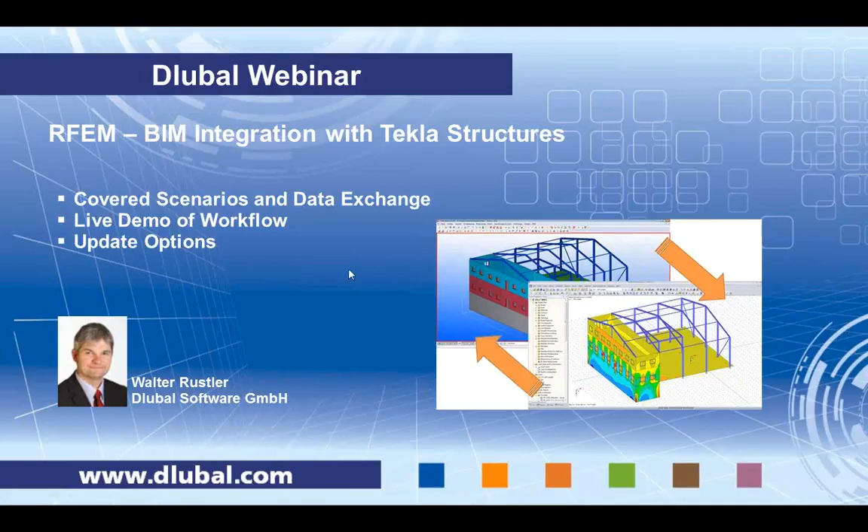So in a sense, it gives us more specific options to import and export data and to directly connect the objects in both applications. It is a bidirectional interface with update options, and it works in a 32-bit and a 64-bit environment.

We can distinguish between a physical model and an analytical model, and it is important to know the difference. In general, when you work in an architectural program or a CAD application, you basically model the structure as you would build it later. When you do an analysis, you make a more simplified model that doesn't include all objects, like, for example, door frames, window frames, and other non-load carrying parts in that model. Therefore, we have to make a difference between the physical and the analytical model.

And in general, there are some problems when you work with a physical model in a structural analysis program, because, for example, a beam might be cut off at the edge of a column, and therefore there is a gap between the center line of the column and the end of the beam. So in the analytical model, we have to overcome this gap and provide a connection, basically bring together all load-carrying parts in one structural wireframe model. And it's a mechanically correct model that includes also maybe 1D members like columns, beams, or bracings. It may include walls, slabs, or other surfaces.

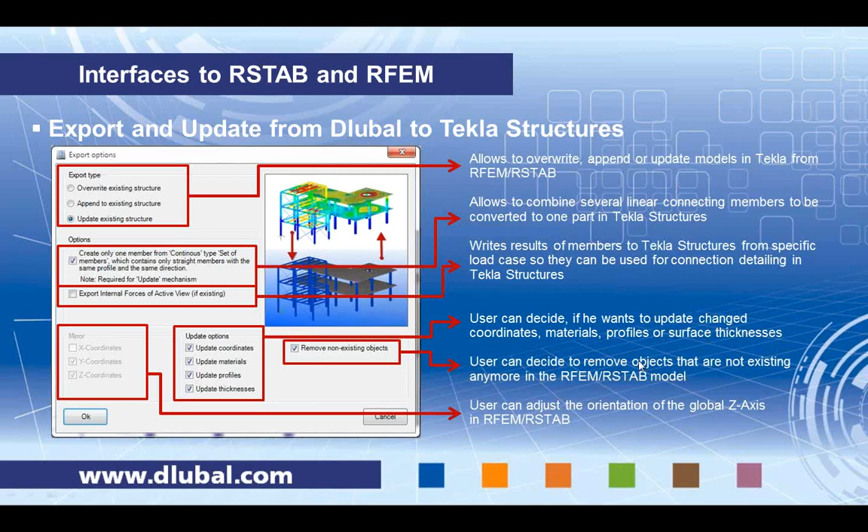Additionally, we transfer information like the node numbering of the Dlubal analytical nodes, or the material, or set of member numbering, so you can find the parts that you see in RFEM also in Tekla Structures. By inquiring the objects, you will find there, okay, member number 235 in Dlubal. This is what I have here now.

And I can go to the Dlubal model and see, okay, where is member number 235? All those user attributes can also be displayed on a drawing, for example. So it would be a good way to use it for an overview plan that displays the numbering of the structural objects, maybe, or whatever you need it for.

Anyway, we can update the Tekla model with grid lines, with information about the used materials, and also the node numbering, and additionally comments. That means I can write there, for example, this is a new beam, and then this comment will be also there as a user-defined attribute, which you can use then for filtering inside Tekla and so on.

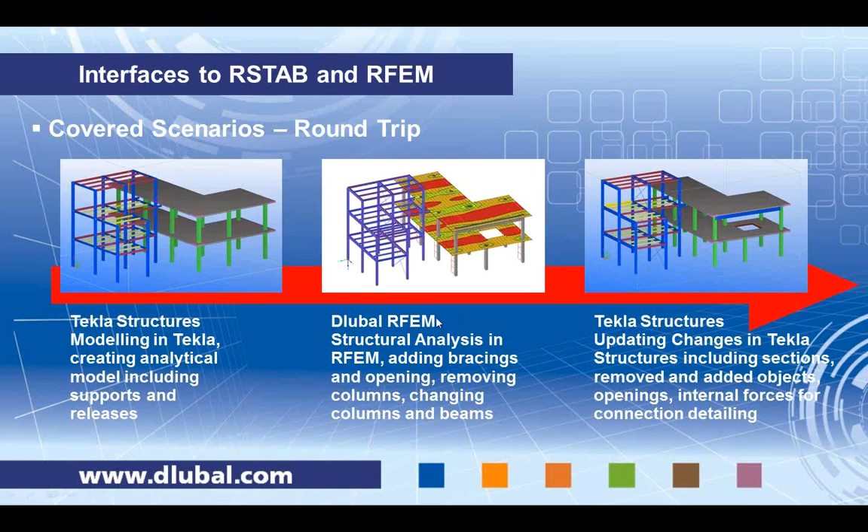Another option would be, and we will see this live in a few seconds. Another option is to start modeling inside RFEM. RFEM has great modeling capabilities as well, or you can retrieve a model from somewhere else, from other applications, and we do the structural analysis, but there is no Tekla model.

But somebody would like to have a Tekla model from what he has created inside RFEM. So we can just export it and create also a Tekla Structures model from scratch.

The advantage of this is, for example, you are a draftsman or a detailer, and you need to know which cross-section is used for which column, for which beam. Maybe if there's a simple model you understand and you can read it, but imagine there are 1,000 members and 500 different cross-sections, then it's not so easy to even know which cross-section is where.

And if I have a Tekla model and I'm a Tekla detailer, I might want to work inside Tekla, not so much inside the RFEM viewer. So I can use my environment, my well-known tool, to get this information and to communicate it with somebody else, or to use it for even detailing and modeling.

All in all, it is all about saving time, increasing quality and productivity, and this at the same time means also avoiding errors. I think you have very well matching tools here with RFEM and Tekla Structures.

The next will be the live demonstration. We will do this 3D building here and import it from Tekla Structures. But before we do this major structure, I'd like to explain a little bit the options you have inside Tekla. I would like to point out that I'm not a Tekla expert, but I can show it a little bit.

And if you have questions about Tekla, please also contact your Tekla vendor or your Tekla company. You can find them at tekla.com. I'm sure they can help you out in more detail.

I have Tekla open in the background, and I'm now inside Tekla Structures. Here I have a simple model which is not very spectacular, but it includes a few things I think that are important to explain the use of this interface.

So here you see the physical representation of this model, and you see there are certain beams and columns. We have the situation that some beams are top of steel, some are maybe connected center line, above, whatever. We also have here a column that is a typical situation where there's a wide column and a narrow column.

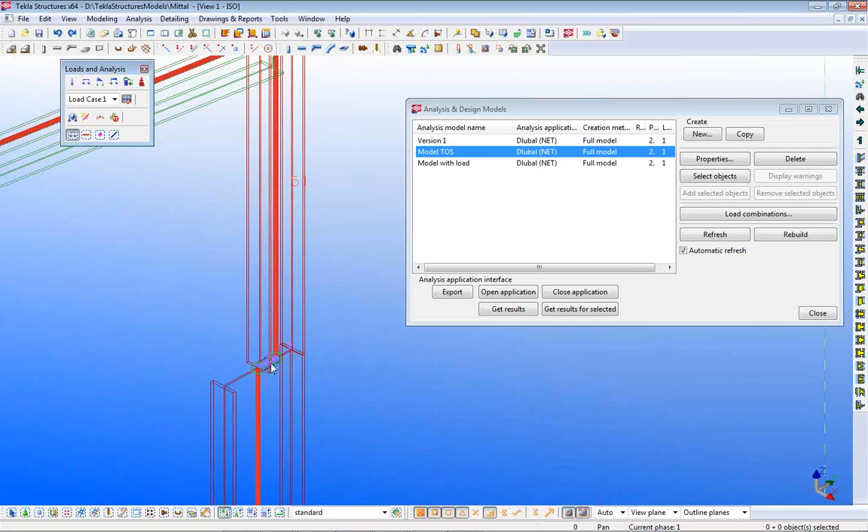We see here, for example, now everything is modeled by the center lines of the columns. So the statical model is in the center line of the physical model, and because of this we have here an offset, and this offset is closed by a rigid link, which is shown there in blue. This is done automatically by Tekla, more or less.

Then we have here the beam on top of the frame, and here the analytical line is in the center line of the top flange. So it is important because you might want to have the correct column length or the maximum column length, and if I analyze it in the center of the beam here, then I would lose maybe half of the depth of the beam and so on.

And maybe if I have a wind load there, the wind load is not big enough. So how can I do this?

I create something like this new, and I say here create new model. I can have several models inside Tekla, inside one Tekla model, and I can say this is my model new 2 maybe, and here I can select whether I want to use the full model or only selected parts or different settings. I can apply filter if I want to.

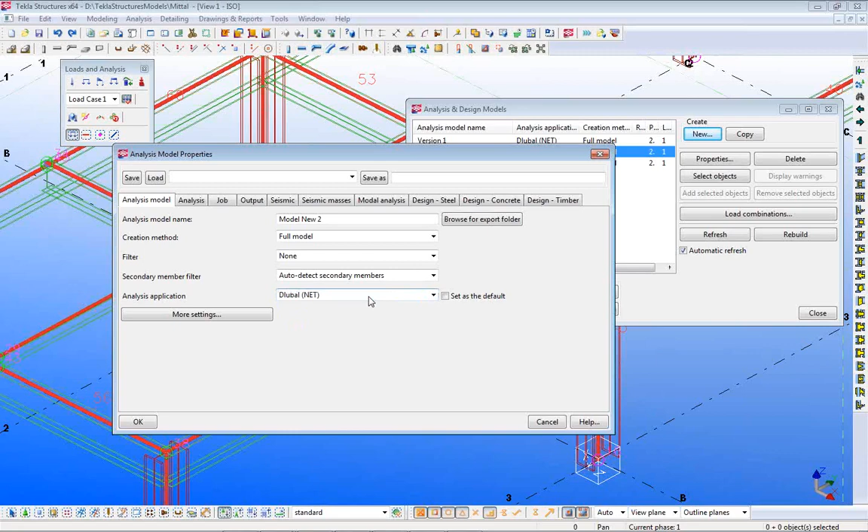There might be other interfaces here listed in Tekla to use. And then we have here more settings, and in those settings we can set up the reference axis, member axis location, and this is an important thing. Now it's set up reference axis eccentricity by neutral axis. I can also use, for example, the neutral axis.

If I do this and click OK, you see what happens. All the analytical members are moved to the center of the physical member. Because we have here a different depth of the sections, we have the problem that the center lines do not meet in one point, and Tekla automatically creates so-called rigid links.

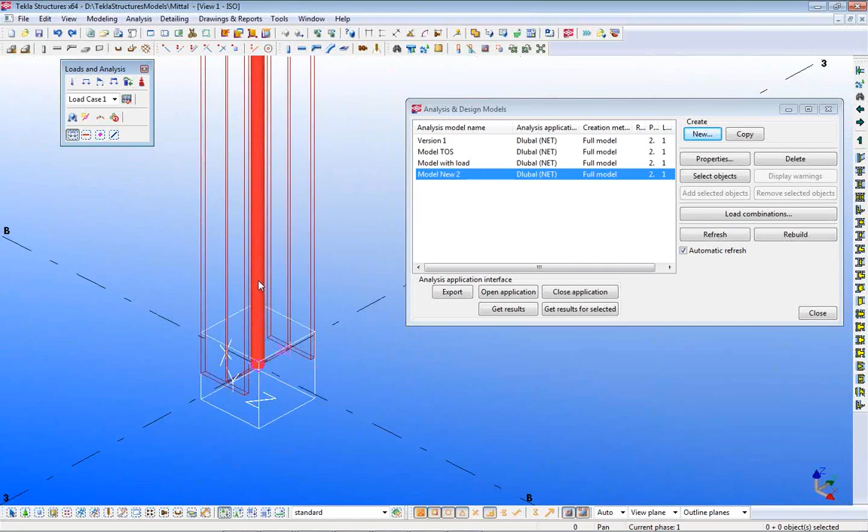Also inside Tekla we have here, for example, support conditions symbolized by a white block here. If I edit the member here, okay, let me see, to edit it, okay.

It's possible typically to, maybe I have a filter which is not - I'll show this later to you. We see here that there are numbers for beams and for nodes. We see here the supports, and we see here how the physical model changes.

If I change it again, for example, to not neutral axis, but reference axis - if I do this, it is rebuilt automatically, and you see here other placement of the center lines.

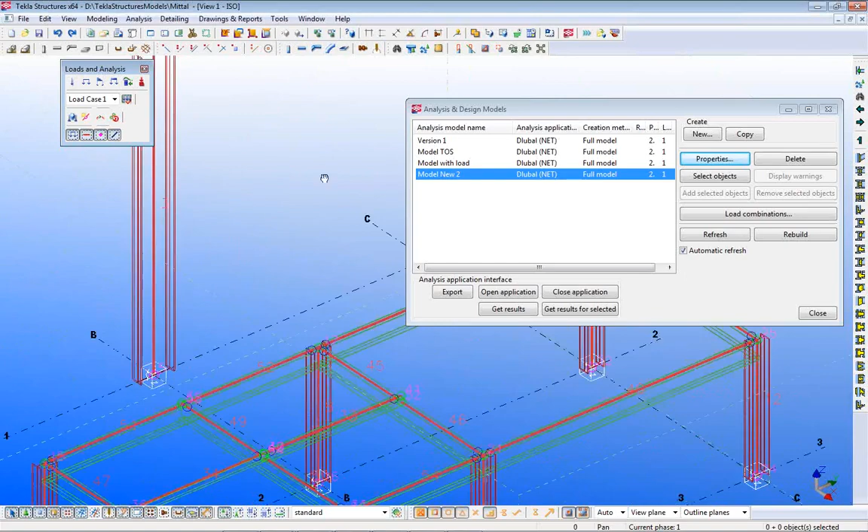Okay, I didn't activate my mouse arrow here. So let's say I want to change something here, not globally but locally. For example, here I would like to say this analytical object here should not be on the reference line.

I can change it, and I can say here, okay, position, not reference axis, but maybe neutral axis. And I modify it, and axis, reference axis, let's see what happens.

I had this problem also yesterday during a demo, and then it worked, but never mind. You can do it also individually - that means you can do it globally, so all the offsets are changed, or you can do it member by member.

Let's take a look at the support conditions. If I click on the column, for example, you see here start release is a support, or it can be a pinned support, or it can be only connected, or you can have also free definitions. Then you can enter some spring constants and so on. The end release is only connected, so on the top here we have no connections.

Or the same thing here for the beam. I click on it and say start release is connected. We see here with a release, and I see here a circle. If I do not want to have the release and say I want to have it fixed, I modify it, and then it's changed.

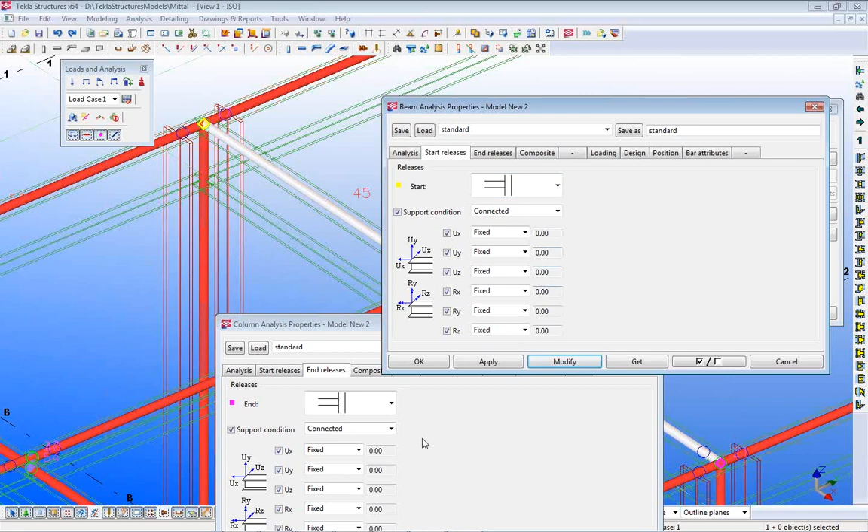So it is possible to individually adjust this analytical model. I open another model here. We see, for example, there are also loads. I can display the loads basically here. You see here there's a load inside Tekla Structures where we can apply the magnitude of the load, and this is also possible to implement inside Tekla.

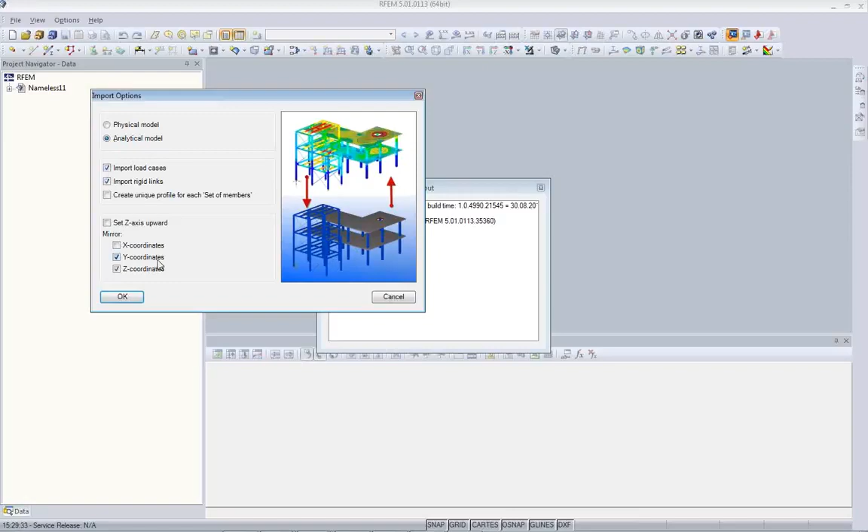Maybe I try to import this model quickly into RFEM. I open RFEM here. In RFEM, I open the direct import from Tekla Structures, and I get my import option that we just saw in the slide. I want to import the analytical model, import load cases, the rigid links we see, click on OK, and now I have a selection of the various analytical models I have inside Tekla Structures.

So the same models that I have here are given to me as a choice inside the interface. So now I use the model with the load, which I'm just displaying here. I click OK, and there is a little bit of a protocol that goes through, and then I have here my structure inside RFEM.

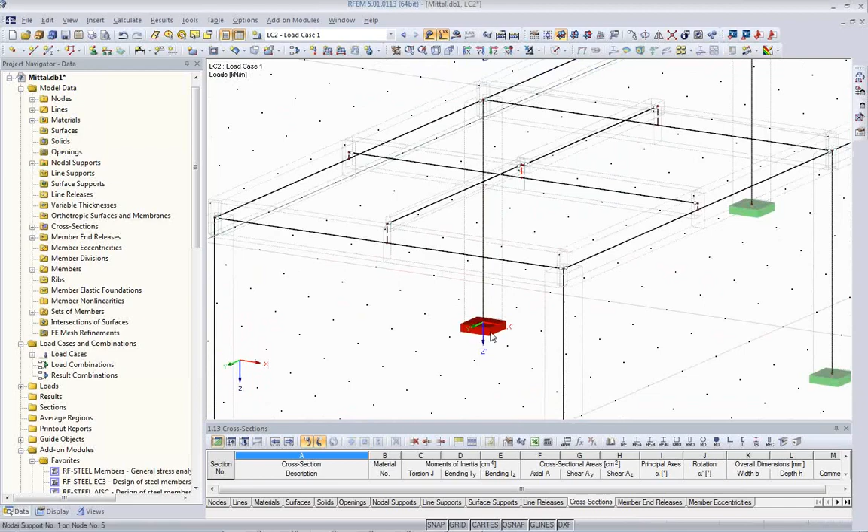We also see the load is here, and if I go to the wireframe display, we see also we have rigid links, we have the offsets that come from the Tekla structure model. We see the support conditions are here that we can use, and also the columns have this offset here. So this is how you can set up your model inside Tekla Structures and change it, and already prepare the structural model inside Tekla Structures.

Now I'll use the more complex model that I have prepared, and I open this inside Tekla Structures. This model includes not only beams but also slabs and walls, including openings, and I prepared several models inside already.

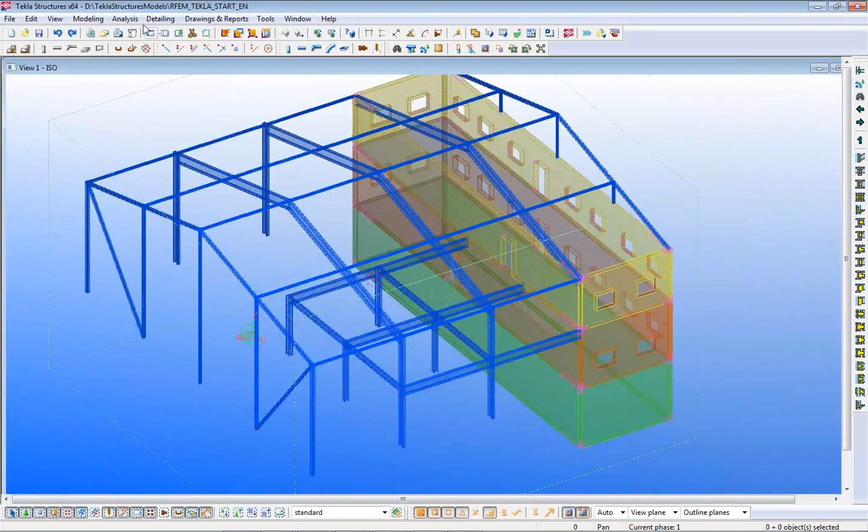You see here it's a hall including a second level, and there is a basement including some slabs here with openings, windows, and so on. Inside this model I have prepared already the analytical design model.

Actually I've prepared several models. I have prepared, for example, the concrete part, so I only get the concrete part here. For example, I can quickly import it here - concrete, and import here the analytical model. I don't want to load this time, and say here concrete part.

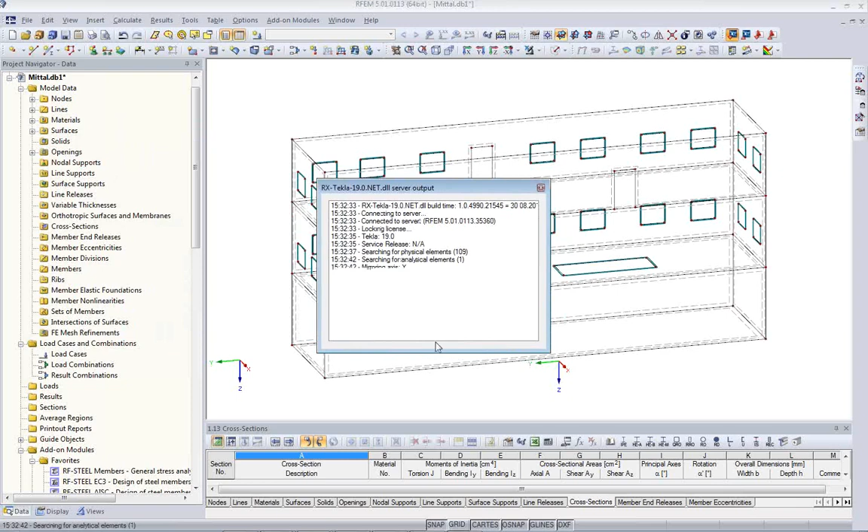So even though I have a 3D model in Tekla Structures, I can load only part of this model, and I can say, okay, now I don't want even the 3D concrete model. I want to have maybe only one floor or one slab in the first level. So I have just one slab here that I can work with, so I can do a simplified analysis.

And also the same way I can say I want to have only one end wall, and I do like a 2D analysis of this end wall here, for example. If you want to, you can import only one beam if you want to.

Please note, here's two analytical members. Inside Tekla we have one part. When I update it later, it will be staying one part inside Tekla. But actually I want to have the entire model.

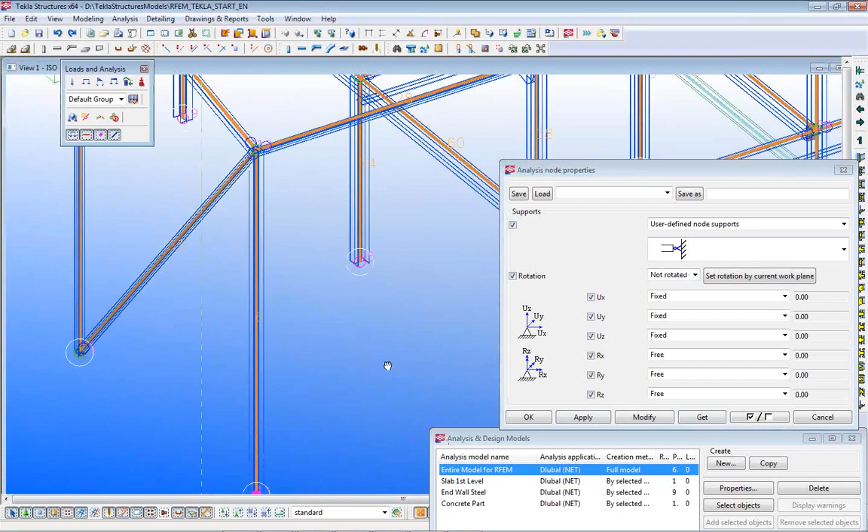Maybe I explain a little bit about the entire model that I have done in Tekla Structures. Here we have support conditions, which are pin support. We have set up releases already at the ending of some beams here.

We have openings. I've made the model in such a way, for example, that those beams here are modeled as top of steel, and this analytical model lies on top of the center of the top flange. So it's one level, and important is when we update the sections later, that those sections, even if they change in the section, they should stay top of steel.

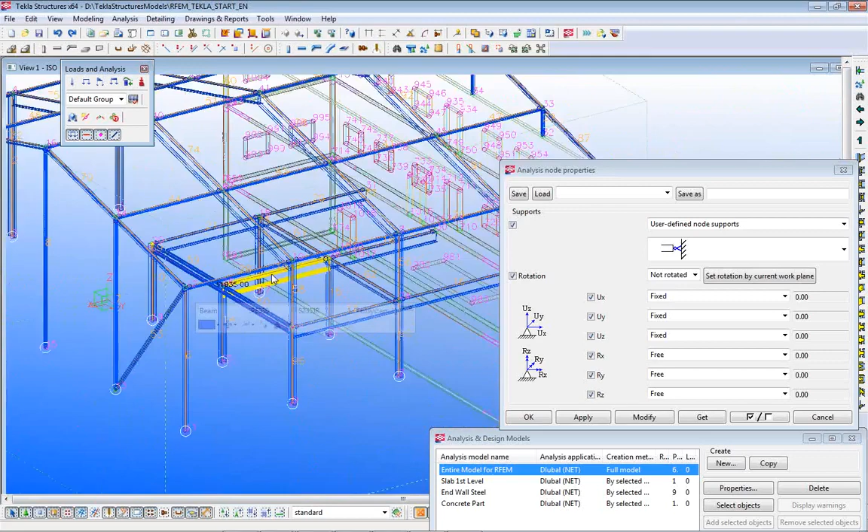Also here the walls are modeled as center lines, and the slabs as well. So I'm closing the model here and stay with the physical model view. I start inside RFEM and import the analytical model, including rigid links, which I don't have at the moment, and click OK. Now I choose the entire model, click OK, and we are importing the entire structure.

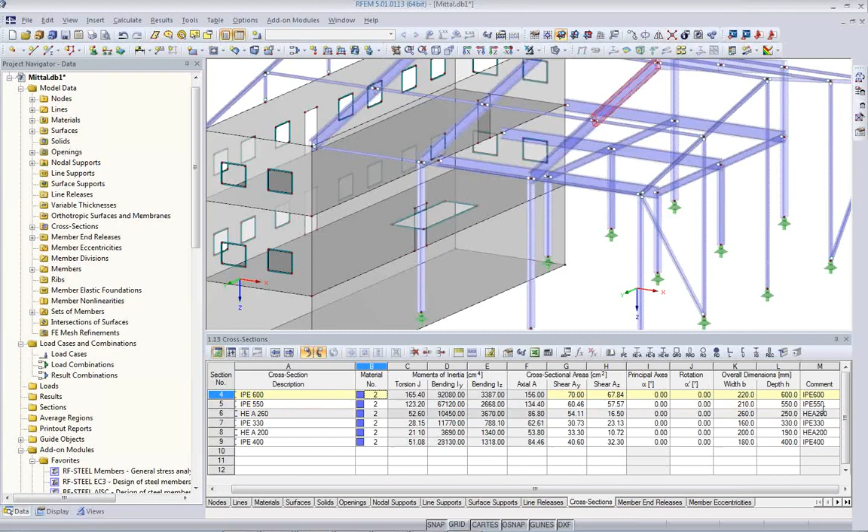We see here we have the supports, we have a variety of releases here. We have the openings, and we see on the display that we have already cross sections imported. When I look at the table of cross sections, I see they are all converted from the Tekla designation, which is missing the blank between IPE and 550, but Dlubal has a blank there. So we internally map all these cross sections.

Also, the materials are already set up according to Eurocode, and in Tekla the material name is much simpler. We include the code. How does this happen?

When we import, we have a variety of files, of course. We use direct import from Tekla Structures, and in the details settings I have the option to set up a conversion file, or I can edit this conversion file. Here I set up which name of the material or cross-section should be converted to which name inside Dlubal software. I have the option to import and export it from Excel, and set it up in my company as I like for my typical materials. Once I've adjusted it, it will be valid all the time.

The same applies for cross sections. You can use this very well if you have non-standard sections coming from different vendors. Everybody has his own designation, and it's basically impossible for us to know all the names existing in the world. So we match the Tekla name and the Dlubal name, and can now translate those cross sections automatically.

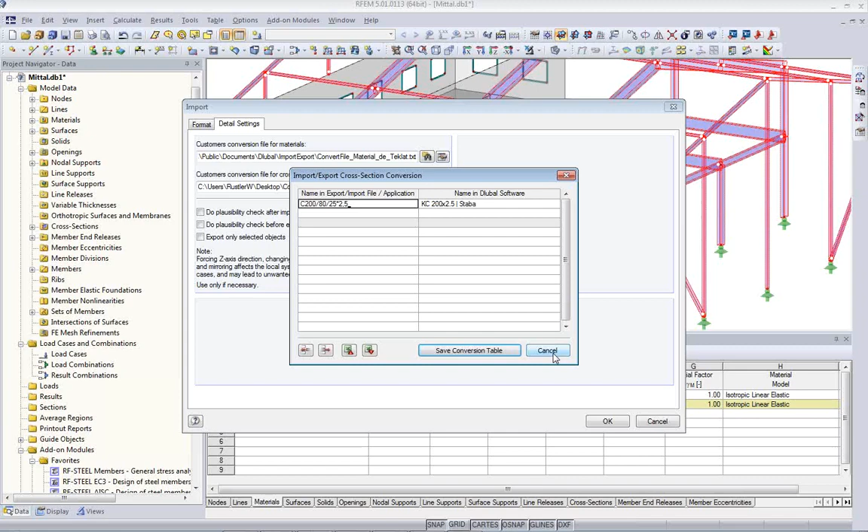Now we'll do a brief structural analysis with this model here, a 3D analysis. We'll change some cross sections, add some members, and do some concrete design. It's a totally, basically independent model from Tekla. I can do whatever I want with it. It's not some special model that only can be used in conjunction with Tekla.

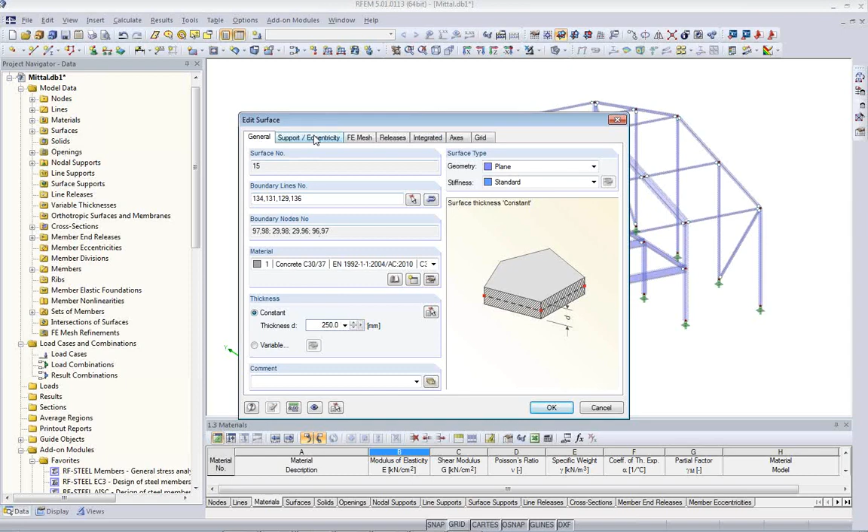So it's totally independent. First of all, I would like to know if it's really working, if it's really well connected and done correctly. So I do a first run and a brief analysis. First of all, I need a support on this foundation slab here, and I enter this support inside RFEM.

I select a non-movable support as a first idea of this support condition, and edit the surface and add it there automatically.

Next, I need a load case to see how the deformations are, or if it calculates and if some parts are loose. So I simply create a new load case, called maybe self-weight of the structure. It will be done according to first order with a default mesh of 50 centimeters for the slabs, and we'll do an analysis. And it seems to be working.

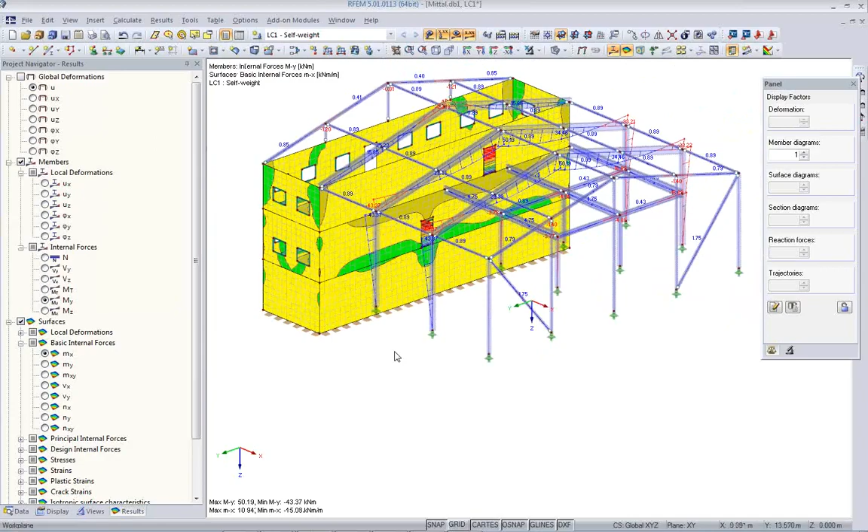I have here now a moment diagram which looks reasonable. I have maybe internal forces of the slabs which look pretty okay.

I can maybe show also the deflection, maybe not now for the concrete, which is rather massive and almost zero, but maybe I only show the steel parts—concrete surfaces by concrete, but members by material. So we can see here all the deformation lines of the members. I can animate them, and this way I can find if there are some loose parts usually, and it looks all good.

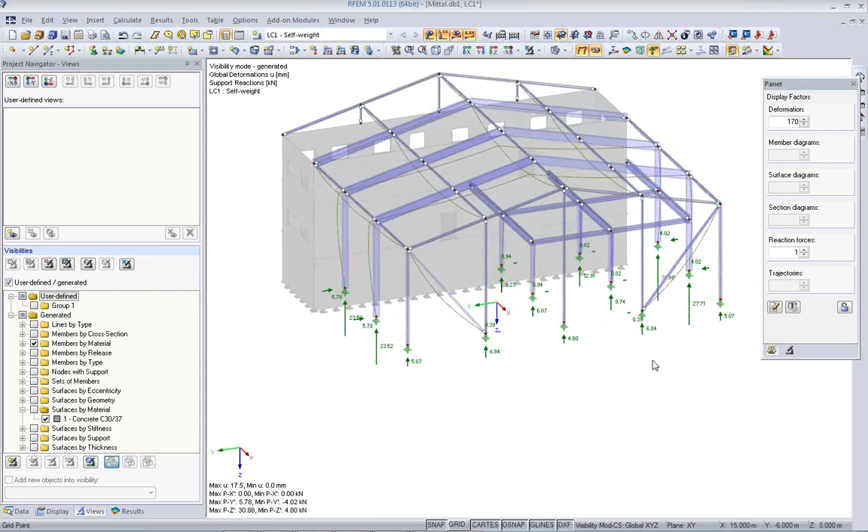Also, the support condition should be more or less symmetric, which is here at the columns, at the corner columns. There's a little bit of difference because here we have this floor structure in here, but it looks quite okay. So my model is of good quality, and I can continue doing the design process.

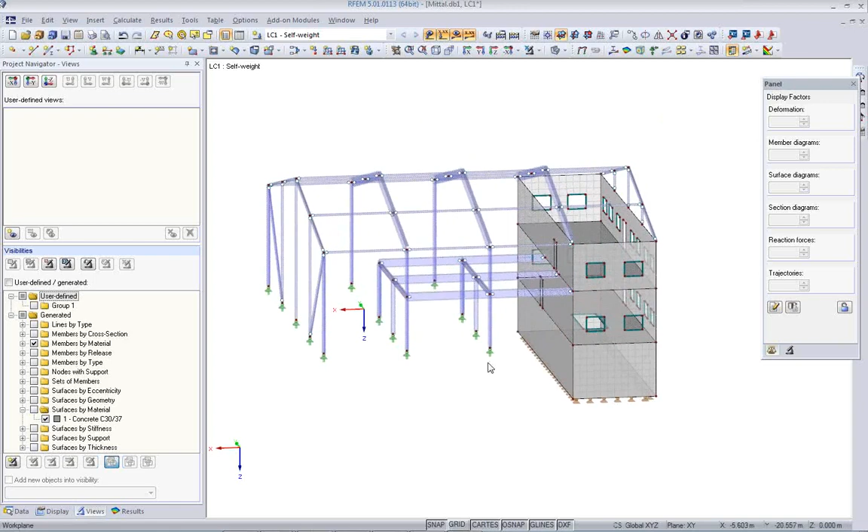First of all, I have to check another thing from the structural point of view. I need some bracings here in the roof—typically we have some bracings here. The first level here of the grid is supported horizontally by the concrete part here, but the roof structure maybe is a little bit unstable, and I would like to have a bracing here.

Before I do this, maybe I prepare some typical views of the structure. I select the roof and create a new visibility from this roof structure like this, and say, okay, this is what I like to save, and I create a new user-defined view. I call it roof.

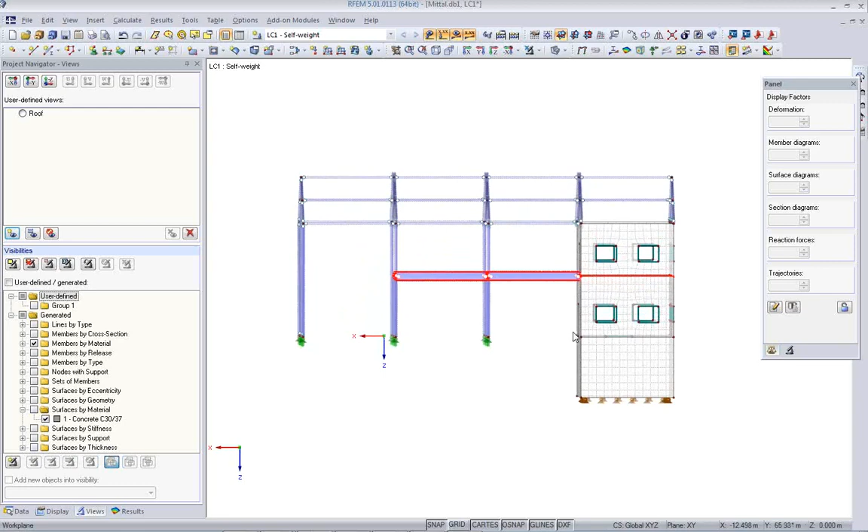Next, I like to do similar things, for example, with the floor here and the additional slab. I can select it like this and say, show me only the selected parts. This is another view I'd like to save, and I call it floors.

When I go to the default RFEM view, it's displayed this way, but Tekla always uses this kind of view. If I go back to Tekla, this is their default view. So to avoid confusion, I'd like to save this view as well, and I name it Tekla. From now on, if I need a different selection of my model, I click here and I have everything I want.

Okay, let's start with the loading. When I go to the general data of the model, I can set up the load cases and combinations according to a certain code. I'll use Eurocode for this. I have here the various national annexes. Because we have an international audience today, I use the general Eurocode settings, available in the detail settings, where we have access to partial safety factors, combination factors, and consequence classes.

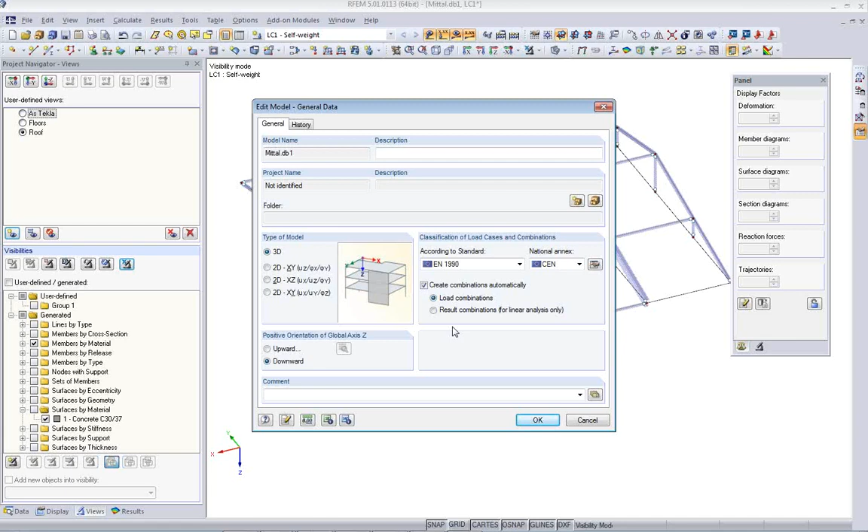Once I do this, I can also create combinations automatically. We stay with a 3D model. The advantage from now on is that all the loads and load cases I enter are classified according to this code for snow, wind, and so on, and the software automatically knows which combinations to create and which combination factors to use. I can do this most comfortably in the tables, which I can display or hide, and next to the model data there is the load cases and combination data.

As you've seen, there is an automatic combination created, but as soon as I change the load case setting, and it doesn't make sense to have combinations with just one load case, it will update or delete these combinations that were done automatically before.

I create next to the self-weight a second load case called snow, and I have access to all the action categories for Eurocode. I have wind as a next load case, and another one, live load, which I type in since it's not listed. Then, because anything could be written there, I have to make sure I choose the right category, and this should be imposed category B for office areas. Okay, I have 4 load cases, which should be enough for this demo.

I have actions, which is a first summary of all the wind load cases and all the snow load cases. They are summed up in actions, and then we combine the actions. Typically we have an ultimate limit state combination and a characteristic, frequent, or quasi-permanent combination. I want to do a preliminary design, so I'm only interested in the design ultimate limit state combination. Then I do a combination based on the actions, and finally the final combinations, which include the load cases and the safety factors.

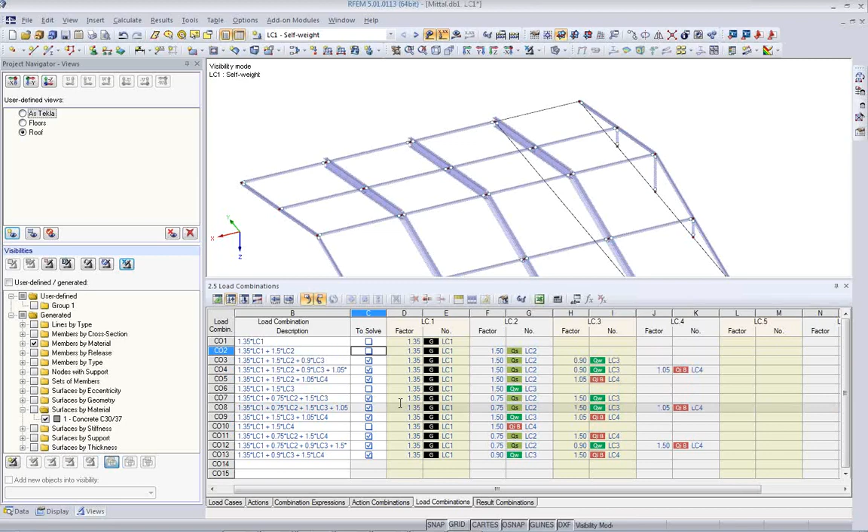Okay, then from these 13 or whatever combinations, I can create a result combination, which is the envelope of all the calculated combinations before. So I get a max-min summary of all the combinations I have to analyze. Okay, this is the combination part.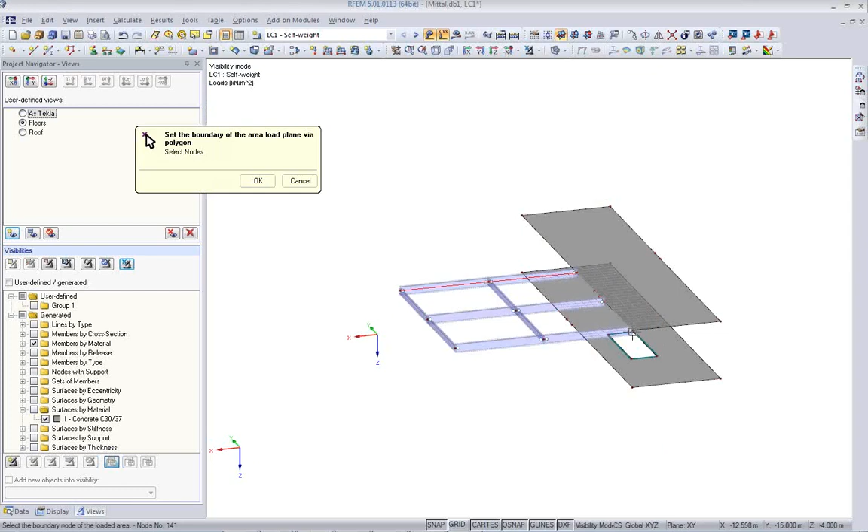The next load, our self-weight load, will also have to be on the floors. That's why I prepared this view. I create another area load on the grid here and select the individual corner nodes, and decide that the distribution of the loading should be on the cross beams. Then two more surface loads on the slabs, 0.5 here and here.

While working with the slabs, I remember I forgot something. Those slabs are now rigidly joined with the walls, but I don't want that. So I double-click the surface, go to releases, and add a linear release that sets off all the spring constants for moments on all the edge lines of the surface. Then I get a linear release displayed on the edge of the surface.

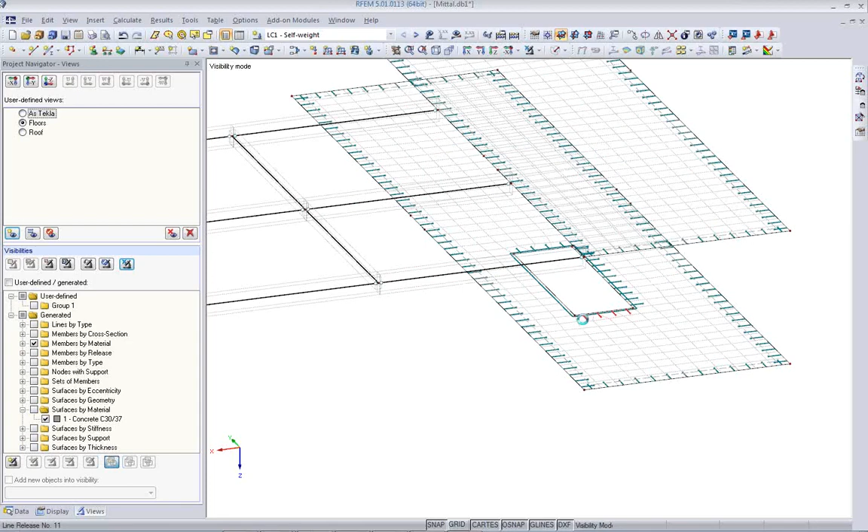I do the same thing with this second surface, creating a new release of the same type, so there should be no moments at the edge in the wall. Here, because it does this automatically on the opening, I have no wall, so it doesn't make sense to have the release there. I can just select it and delete it.

Now I think I have everything regarding the model. We've looked at the self-weight load cases, and we continue with snow.

Snow is something for the roof. Let's quickly go to the roof here. I have a tool called snow load on dual pitch roof, and I can use the Eurocode here, with national annexes again. The ground snow load should be 1 kilonewton per square meter. Now I pick the boundary of this dual pitch roof.

There are 6 nodes I have to pick. It should go into load case 2, which is snow. It automatically filters it and remembers it. Then I say again, only on the main beams I want to have this loading. I get a summary, and my final snow load is applied there.

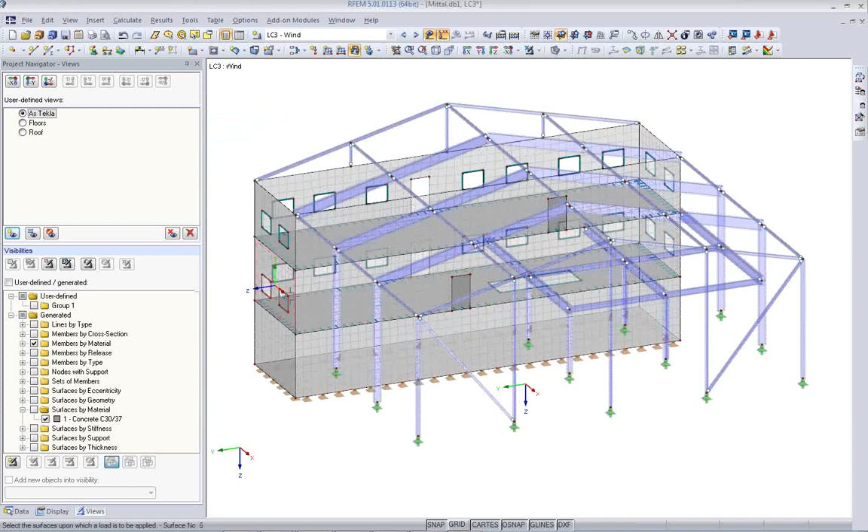Next is the wind load. Wind is on the entire structure. I go to wind here, and I would like to have some wind in the negative y direction. So I add a wind load as force in global y direction, -0.5, on this surface and on this surface. On the opposite side, I have a little bit less.

I create again a smaller surface load. I also need some loads for the columns - member loads in the global y direction. It should actually, in the projection, if it's not straight or vertical, be -2.4 as a member length, as the member load.

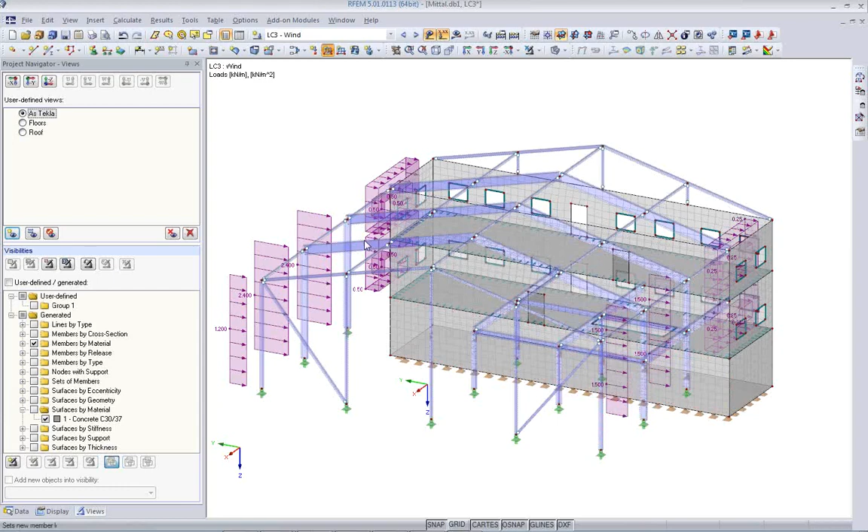On the edge, there should be some lower value, maybe only half. Then on the opposite side, again the same thing, but -1.5, a little less for the center columns, and -0.75 for the edge columns.

Additionally, I have a wind load on the roof, and I use the generate wind load on dual pitch roof function. Again, according to Eurocode, I need the height of the structure, which I can grab from the structure, and I need to select the roof points.

Now it's important to understand where the wind blows on the structure. You see here A, B, C, D, and I use this order to select my nodes as well.

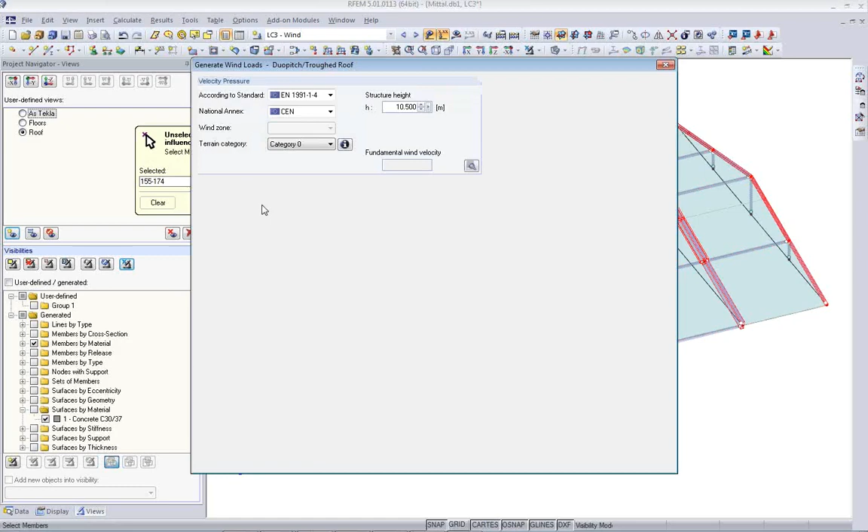The wind load should be analyzed going to load case number 3, and I only want it on the main beams as well. You can see in the background also the impact categories or areas, G, F, H, J, I, as in the code. And it creates my uplifting wind load.

Last but not least, we have a live load on the floors, which is basically simple. We create another surface area load. It remembers the last input, so I only need to add the actual live load. It's updated here in load case 4, and the same live load, 3.5 as global, in the direction on the slabs.

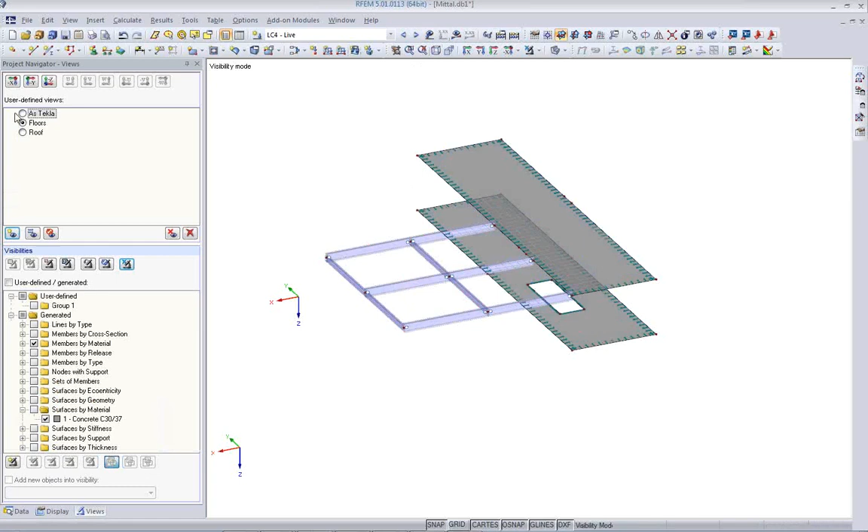We have for typical structures, we have wind load generators as we've seen for the roof. But for our demonstration here, it should be enough, and we will do the analysis now of this structure.

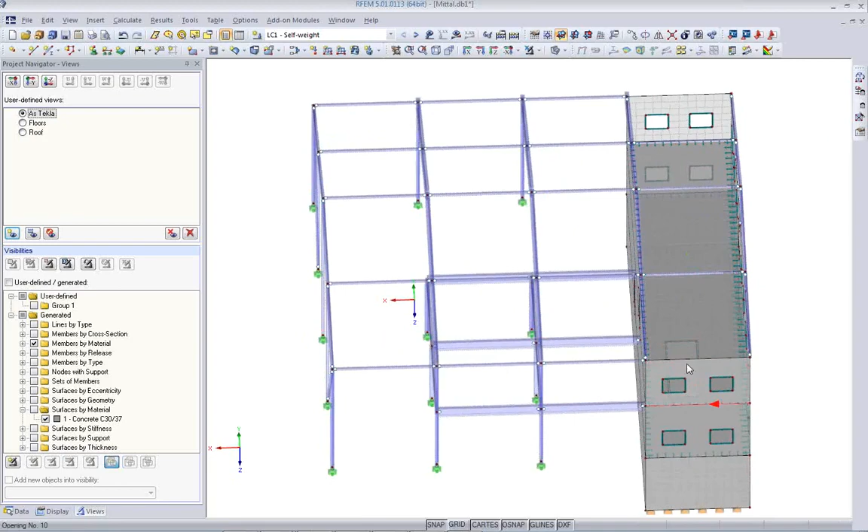Maybe before I run the analysis, I remember one more thing I'd like to do. I got a call from the architect, and he says he wants to have the same opening which I have in the first floor, also in the second floor, because otherwise there is no way to get up there. So we need to quickly copy this opening. I select the opening, move copy it, make one copy, and copy it from here to here. Okay, so now there's an opening also on the second level.

Now we run the analysis, or we go to the design basically. Design is done by the additional module Steel EC3. I'll briefly go through this module. There are other webinars that already cover this module, as well as there will be another seminar covering the concrete module, which I will show in a few seconds as well. But I will not explain now all details, because we want also then to exchange data with Tekla.

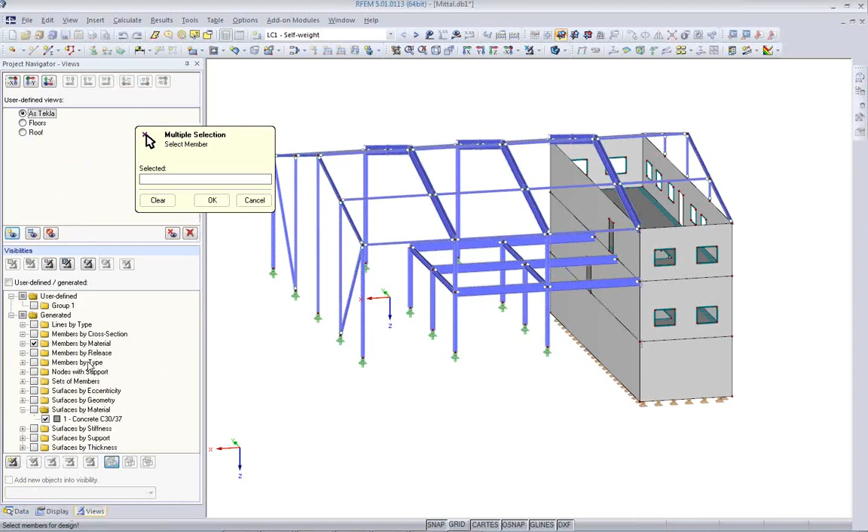Now we go to the RF Steel EC3 module to optimize some of those sections. We have Eurocode design, we have here also national annexes, and I select a series of members I'd like to design. Here I'll use the views tool again to select, for example, members by material, so I hide all the concrete stuff which has nothing to do with EC3.

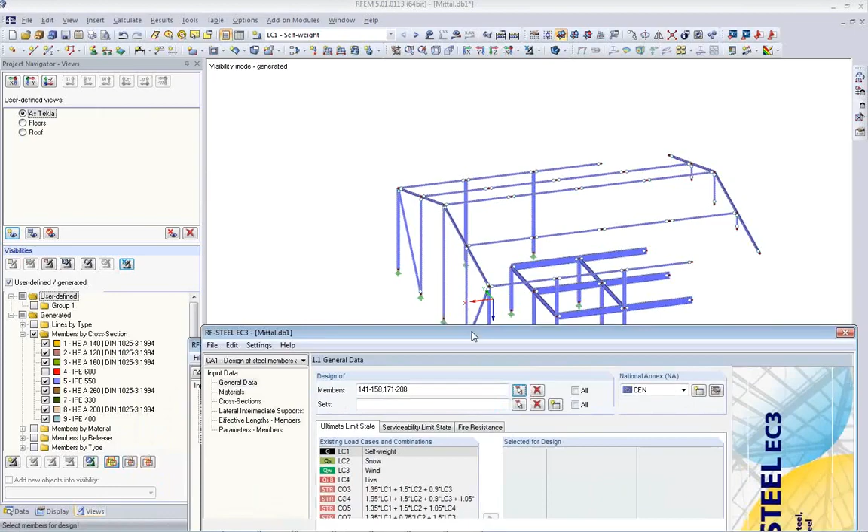Also, I can do similar things like members by cross-section, and if I open here this filter, I can say please do not show certain members, for example, I don't want to see those. It has a reason, because those main girders I will do in a different design procedure, but those will be all done as members, because all those members have design lengths equal to member lengths, with the exception maybe of the columns, but we'll neglect this in this case.

I select for design the ultimate limit state combination that I have pointed out before, and now I'll select also the set of members, and I can now select, for example, clear. I select those main beams that are here, which are 6 main girders. The design length of these main girders is the entire length from the wall to the pitch of the roof.

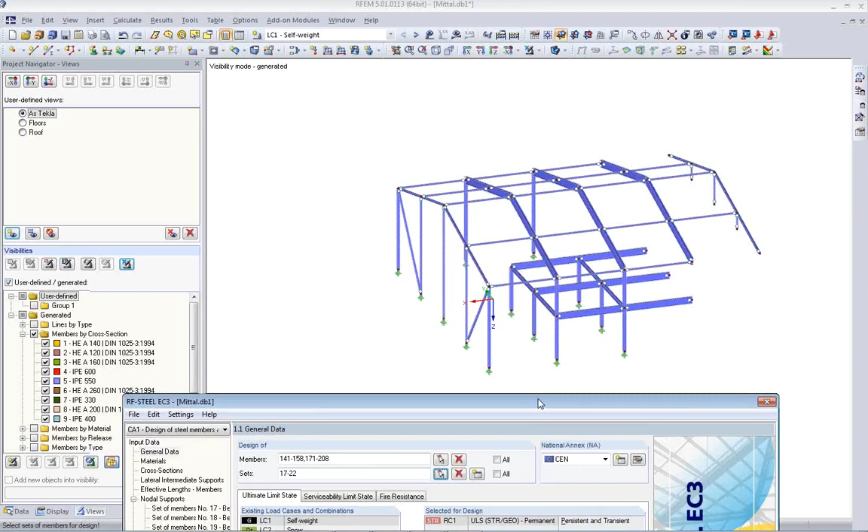It has a local support which is held by the frame, which I forgot to enter, I see, which is supported by the bracing, which I forgot to enter, in the center. So the buckling length in the weak direction of the cross section is smaller.

I can select now in the stability design that I want to use the equivalent member method, or I can use also the general method, but the equivalent member method is maybe more simple in this case, and is the more general option that typically is used, and that's why I selected here.

We have the materials, we have the cross sections that are imported now from the structure. We have lateral intermediate supports for members, and we have effective member lengths, and we have effective member lengths for set of members.

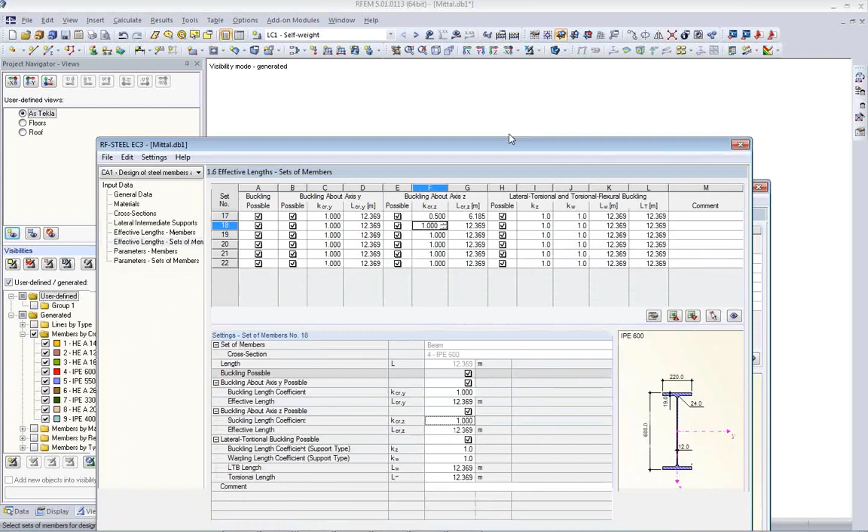And here I select the factor 0.5. So about the local axis z, which you can see here, the bending, the buckling length will be only half of the actual member length. And with the use of set of members, I can handle this very comfortably. Otherwise, I have the option to take into account rotational restraints from a steel deck, for example, or shear action also from a steel panel, which is, of course, increasing the stability of those beams.

Before I run the analysis, I go back and I will enter the bracing, which I forgot. Let's go back to the roof. I have a tool that quickly allows me to add bracings.

Tension only members. I create a new cross section, which I can just enter here, and I can select steel as the material. Now you can go either to the library to pick it, or you can enter it manually. If you know the name, it will automatically read it from the library.

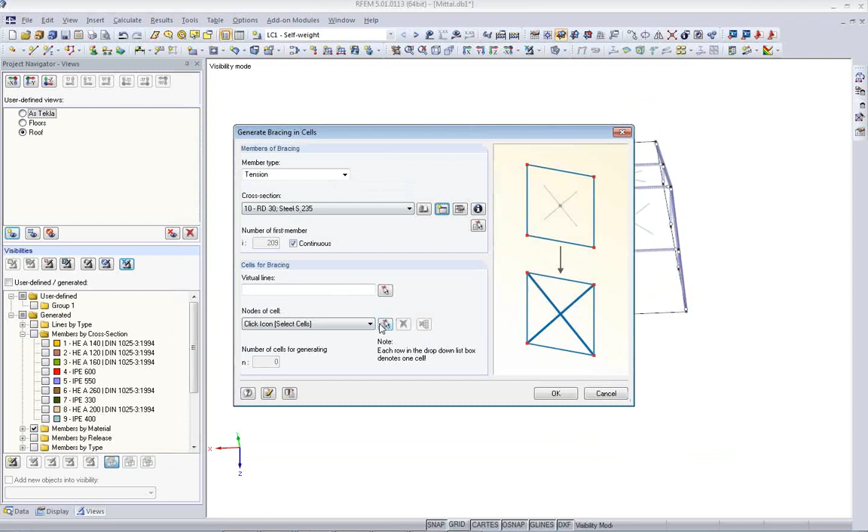Okay, it's tension only members, and now I can just select the bracing crosses here, which the software finds automatically the enclosed cells and gives me a symbol, and I can select those symbols. Otherwise I would have to manually enter all those beams, which is more complicated, and quickly I've created my bracing here.

Here we go, we have the entire model, and now maybe we have to talk about concrete as well. Let's design that too as well right away. Concrete surfaces.

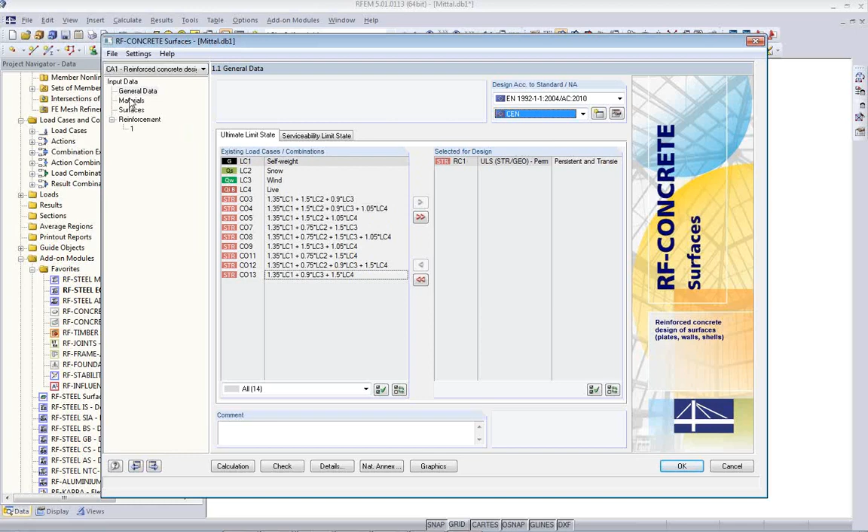We go to the surface module, and we also want to design result combination 1 according to Eurocode with the national annexes for the general settings. I have the materials here, the surfaces, and the reinforcement settings.

I don't want to investigate all surfaces, I only want my 2 slabs. Here I need to talk about the concrete cover. I want to do it according to standard, so I just select the exposure class. Let's stay with XC1, and I get automatically the required concrete cover.

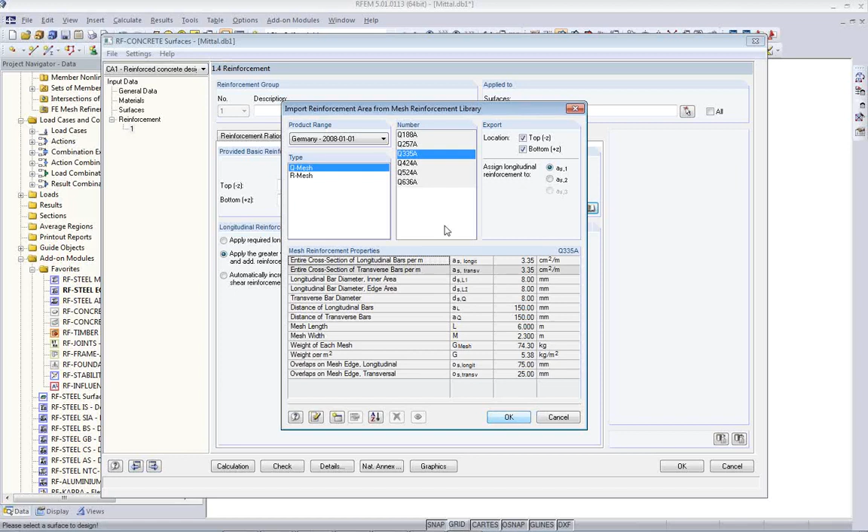I can provide reinforcement that I decide to enter anyway, on top and bottom, to avoid cracks. There's also an option to analyze crack width and so on, but for my preliminary design, I want to have this wire fabric here, and I like to check the minimum longitudinal reinforcement and so on.

So this is it for my settings, and I think now I can just calculate everything. Calculate all.

Now RFEM will calculate all the existing load cases that I have selected for calculation, and I hope everything is going well. I haven't checked it with the real loads, only with the self-weight loads, and it will take a little bit. It's a non-linear analysis.

I can set up that combinations are done linear or non-linear. Typically it's linear for load cases and non-linear, second order or P-delta, for combinations, and we use now a non-linear analysis, which takes into account the additional moments from deformations. So equilibrium on deformed structure is maybe the important sentence to say here.

Okay, after a little bit we will hopefully get the results. Combination 12, and I think we have 13 all in all. So there are several iterations because we have failing members like the bracings, and also we have the second order iterations anyway.

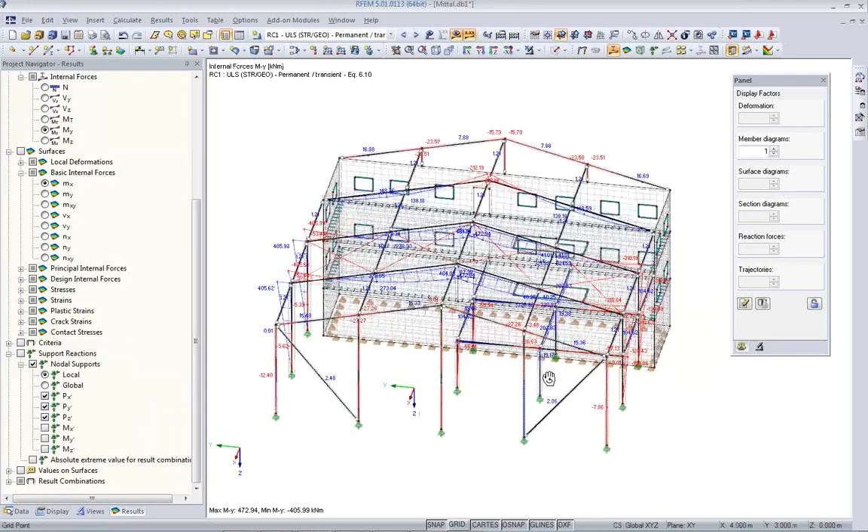Result combination 1, I go to the wireframe display and wire display, and we see here bending moments, for example, from the ultimate limit state combination. We can set up axial forces, bending moments, strong axis, weak axis.

Looking at the weak axis bending moment, I see here, I don't like that. Maybe there's something wrong with my orientation. Yes, I have a frame here, it's a moment connection, and it goes into the weak axis of this column, which is not good for design.

So probably I have to change this. I'll remember this and do it later.

Let's see what we get on stresses. Steel EC3, ultimate limit state, design ratio is 2.55. Let's see which cross sections are a problem.

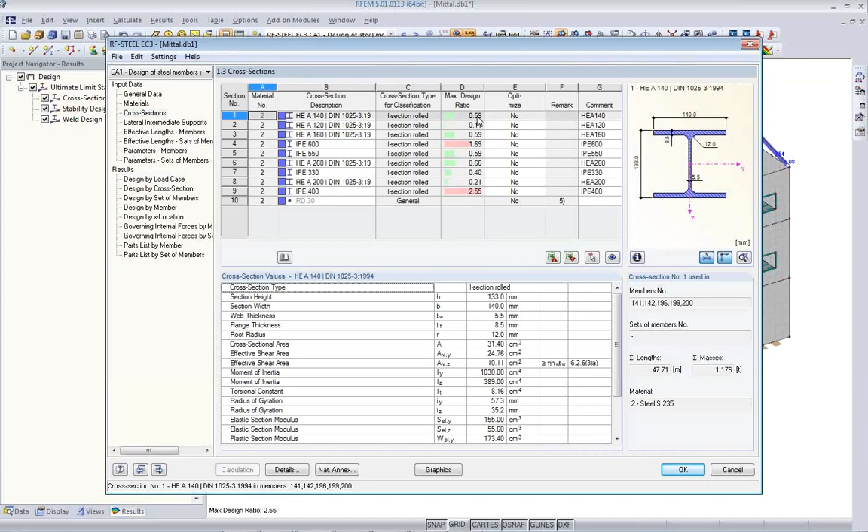I go to the cross section table and see here, okay, there's a problem, not a problem here, not a problem here. These seem to be okay, but these main girders are a problem. Then we have the cross beams here, which are pretty okay.

And I'm missing, actually, now here they are. These are the main columns here, which are not so good. We have IPE 400 here, and it's no good. So something needs to be done.

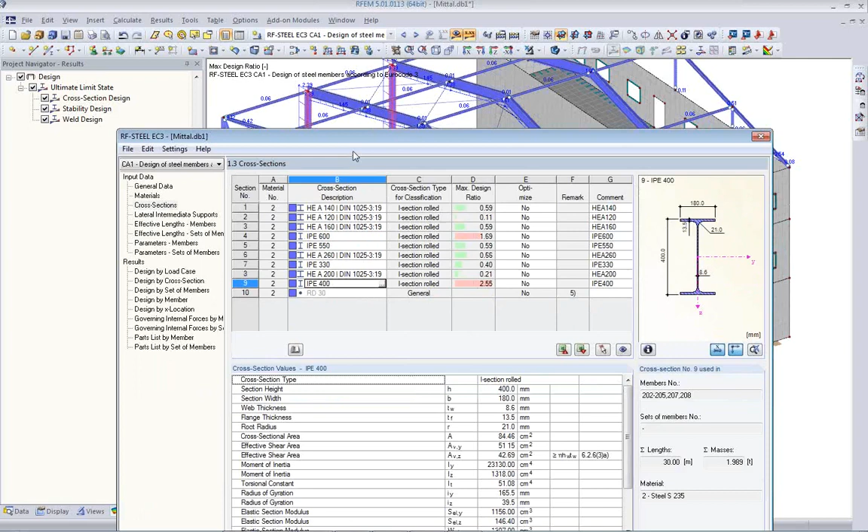Probably it would be a good idea to have an additional column here, and also maybe to support these main girders. Some design considerations that are maybe done while the structural engineer is doing his job.

Also, maybe I'd like to optimize those cross sections, and I optimize them from current row. This means I optimize, but I don't change the type of section. I use HEA, for example, and I stick with an IPE here. And this one I want to change anyway, so I leave it.

Those main girders maybe can be smaller, so please pick another one. Then we have the columns here, which I need to change, but anyway, I'd like to set them up for optimization. I also want to optimize those, and my main columns I want to optimize as well.

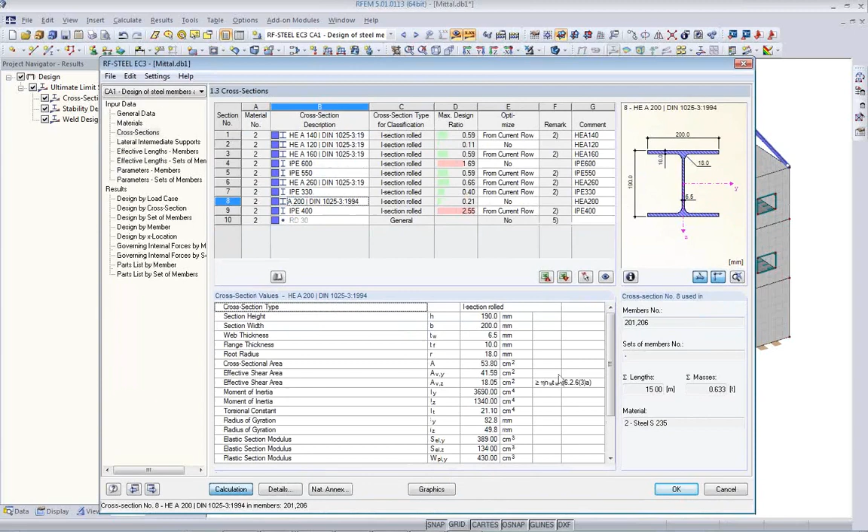I run the analysis, now only in the steel check. So I rerun the analysis here, calculation, and see what I end up with for my internal forces.

It picks an HEA 120 for the corner, 140 here, which sounds reasonable. 500 is okay, we have 240. Let's stick with it. 240 instead of 330 here, and this is 600, so there's nothing to be done.

Now I have the cross sections optimized, and I can export them to RFEM to update my internal forces. I do this now because I already have a better idea from these cross sections.

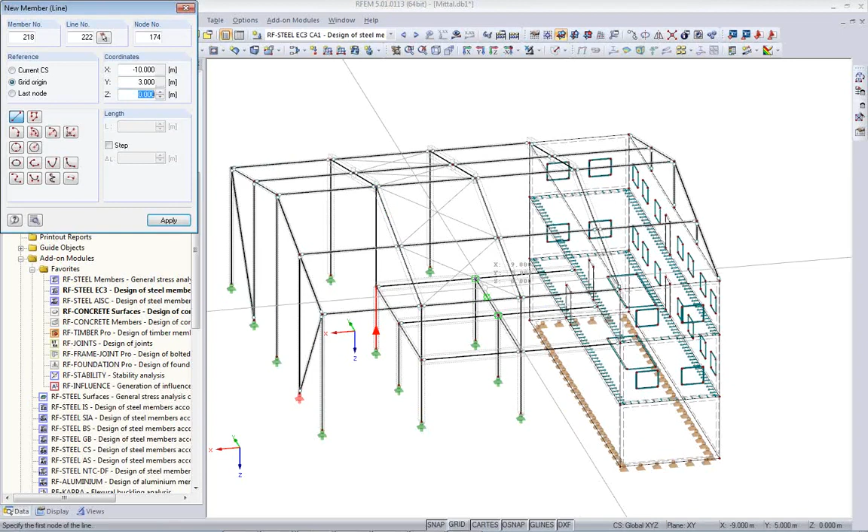The cross sections are updated now from the initial design, and I'm doing my model changes additionally. I want to have a column here. I pick the type of column from an existing beam so I have the orientation and cross section correctly. From here to here, and the same thing from here to here. Also I'd like to have this little column here of the same type.

I copy it, make one copy from here to here. Okay, so everything seems reasonable. Now on the top here, I want to have an additional member release, so I have an easy connection up here. At the other end, I can't forget to rotate my columns by 90 degrees so they carry the moment in the right direction.

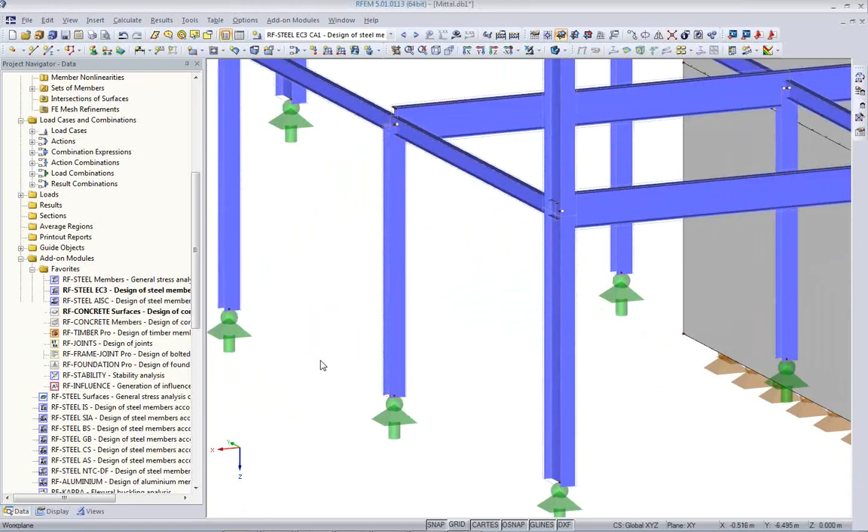With this, I go back and run my analysis of Steel EC3. I just click please show me results of Steel EC3, and RFEM will automatically update the results. This takes a few seconds, which allows me to explain something more in the Tekla model.

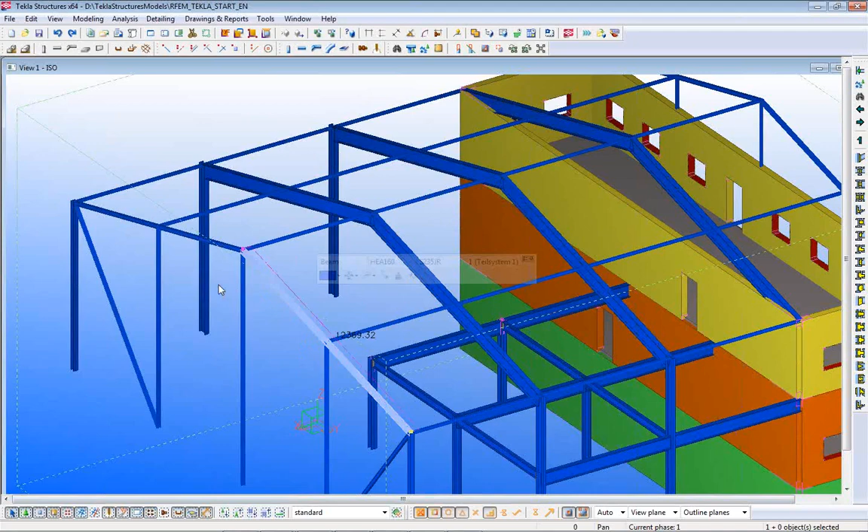In the Tekla model, I also already have connections here, so the connections may be done now while the structural engineer works on the design. It's a very powerful feature of Tekla Structures. You see connections are there. We also see that these parts are one part, one beam - this is one beam, these columns are one part. So it is a different model; the analytical model is a different model than the structural model.

Let's see what RFEM does. We have a nonlinear analysis here. Okay, I think I'm running into a slight problem here, which I need to close and see what happens.

We have combination 11 now that is being analyzed, and then we should get some results. Now we get into the analysis of Steel EC3, and we have a design ratio of 95%.

We open the Steel EC3 module, and we see the utilization ratios are quite okay. We're back to very low utilization of the main beam. The HEB 600, which is the column here, is low. Then we have 600 here too. So we could optimize much more, but we have some changes in the cross sections.

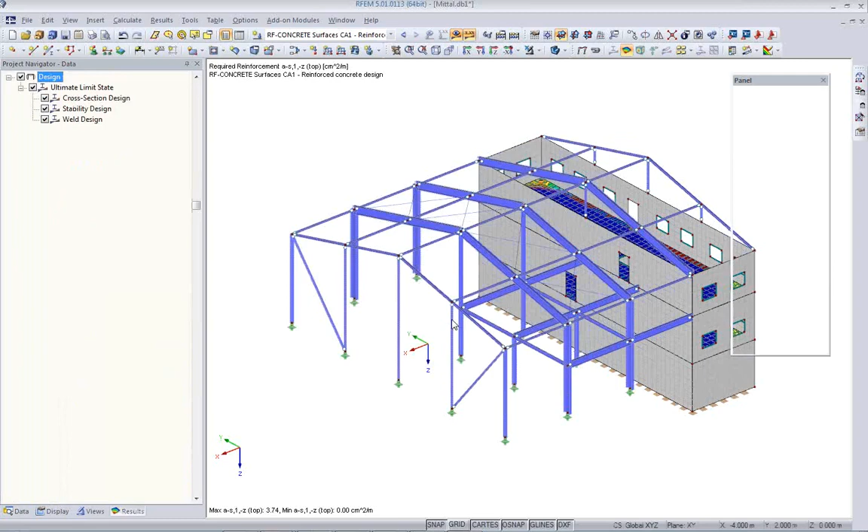Let's have a brief look at the concrete results and do the concrete analysis. I can use my view again for floors, but I need the results here, concrete.

We see here top reinforcement in one direction, and in the other direction. We see bottom reinforcement in two directions. This is the required reinforcement, and we can show the additional required reinforcement. So I have a basic reinforcement, and everything above this is shown in different colors. So basically you put your wire fabric in here, and you put in the additional reinforcement where we have the colored parts. Okay, my design is so far done.

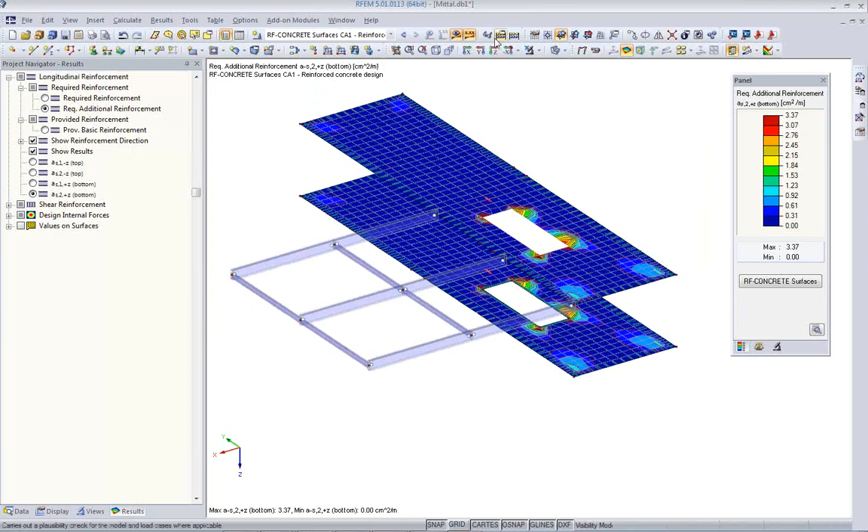I'll keep my results here, result combination 1, and we can now update the Tekla model. So I go to Tekla Structures - the model is here, I've pointed out the connections.

We go to RFEM and say update existing model. We also export the internal forces, click OK, and then go to Tekla Structures to see what happens. After a certain time, we get the updated model.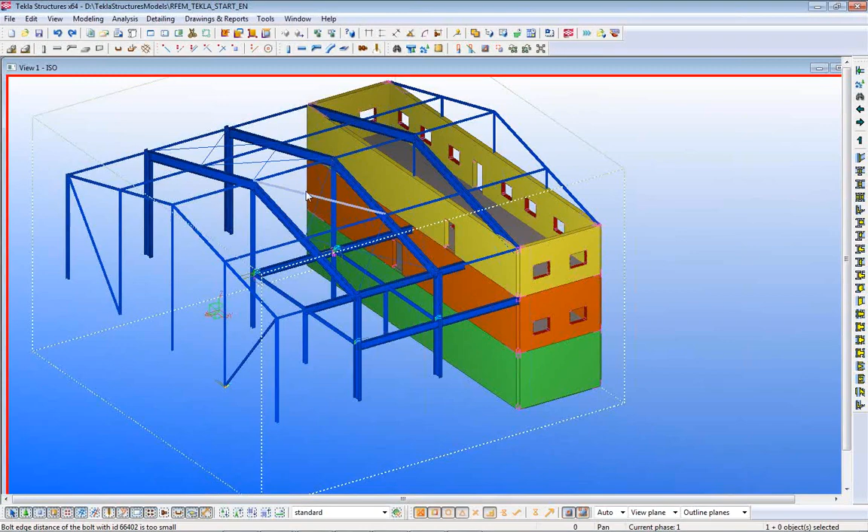We see now we have the bracings, the changed cross sections, and also the updated internal forces. Now I can undo, and you see the changes - we have the columns here. Redo, and see how the connections follow the changed situation.

So we should also have the opening here, and yeah, we can check if we have internal forces. We see here this part of the structure is still one part - it's not two parts like in the analytical model. I can right click on it, inquire part, and we see information from the Dlubal software.

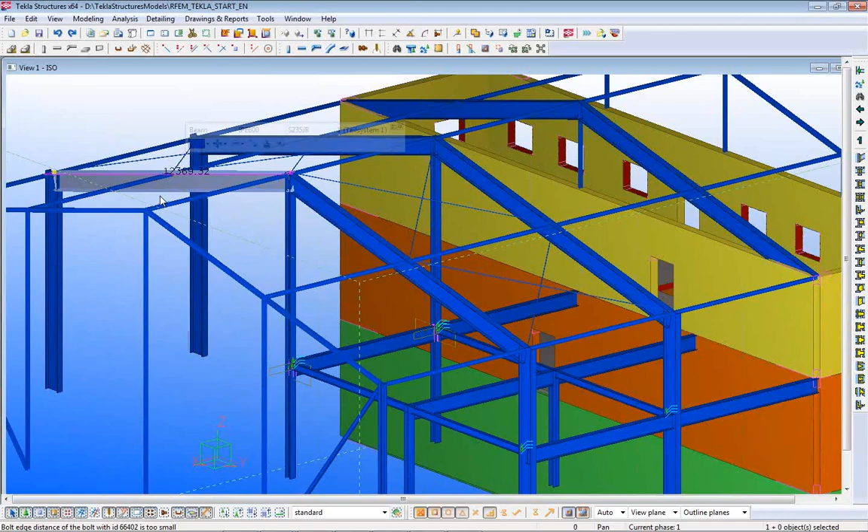We see the internal forces, bending moment 185, shear, axial force. We also see the member number from the Dlubal software, material, and we can reference those objects as well. Let's see whether we find it - 167. I go here, member number 167, yeah, I can select it, and say please show me only the selection.

Show me only the selection. I want to have the results here of the internal forces, 185.5 — this should be the value here, 185.5, moment M2. So now we can use this for information in a connection design, for example.

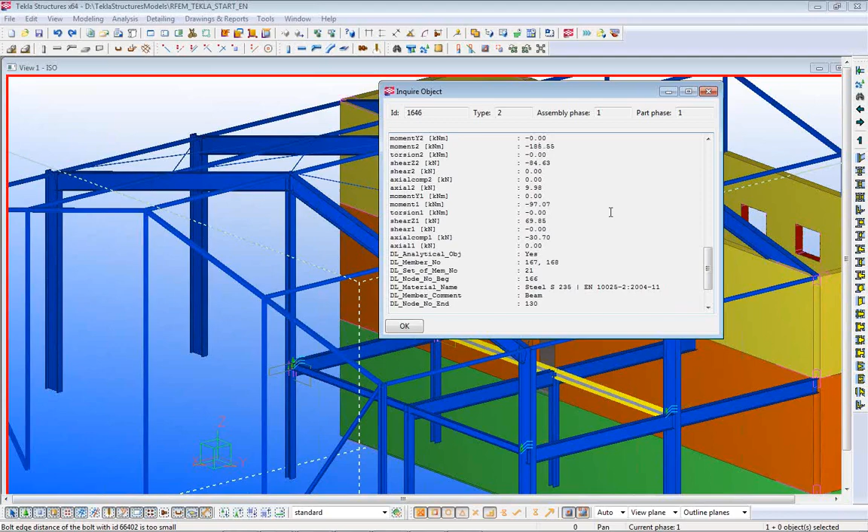It's also important to know that all the beams, for example, are still top of steel. All the work done by the detailer is not lost — it's updated, and we get the changed situations of cross sections, surfaces, openings, and so on.

This is what I wanted to show you live today inside our software and in Tekla Structures. I hope you could learn something from it and everything was interesting for you.

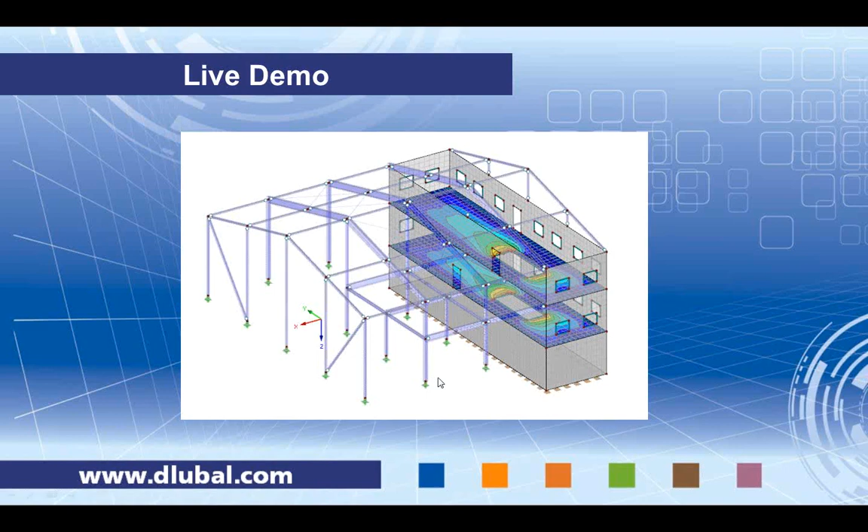Let me go back to the PowerPoint presentation, and I'd like to point out a few more things before we separate today. I think Robert answered quite a few questions — maybe I should take a look at those before we do the information with the other software.

There was one question whether we can handle general sections or non-standard sections. I have shown you the mapping file, but maybe I need to explain this in a new structure.

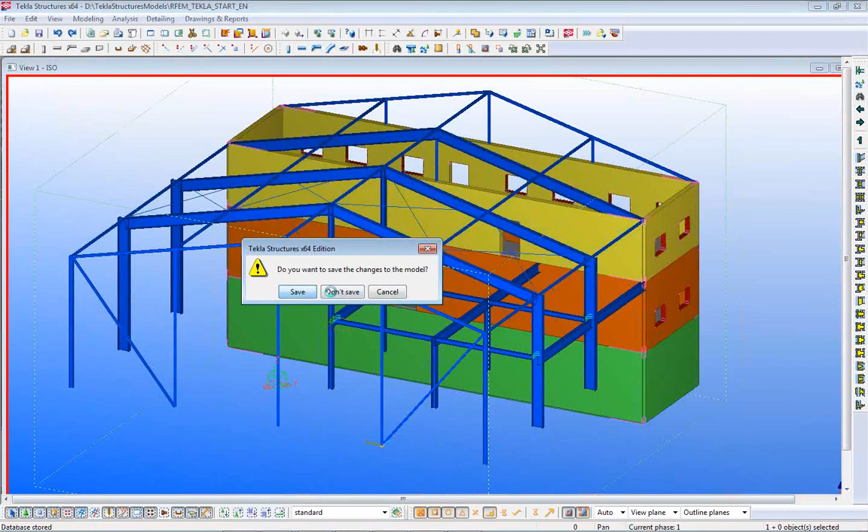Hang on, I'll open a new model — I'll save it maybe better. This is a typical question, and it's not surprising that it comes up here as well.

Here, for example, I have a few non-standard sections — something like a C section, or sections with variable depth, parametric sections. I can also do things like this in RFEM, and I have a typical model for it.

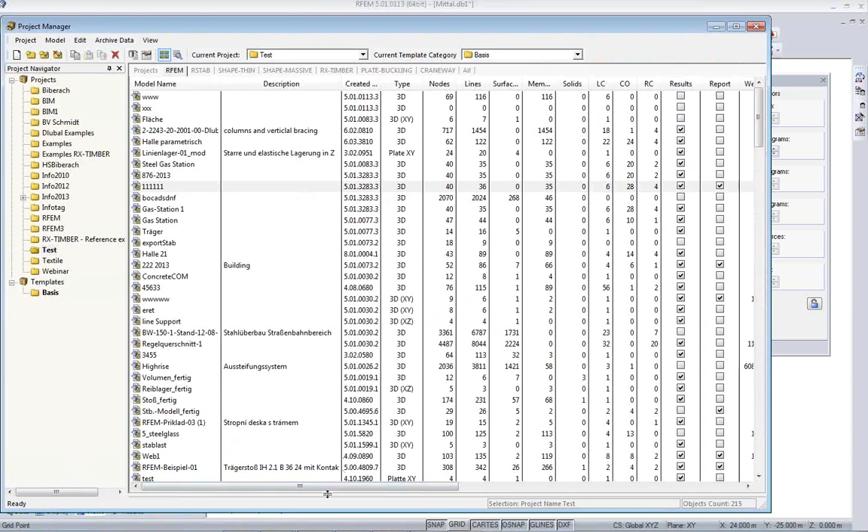I can go here in the project manager — hang on, open it new. We go here and find sorting models, just a second. Sections... maybe now, okay, where is my model? Okay, never mind, let's just use a Tekla model. We can do it that way too. I create a new file.

I import this non-standard section from Tekla — it doesn't matter which direction we go — into this file, import, analytical model, okay. And here I have my new cross-sections.

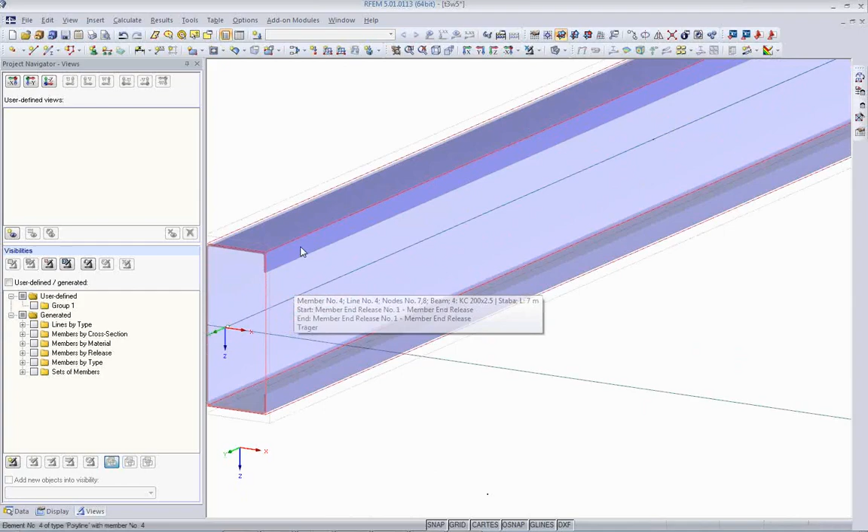For example, there is this C shape, and there is also a boxed shape, which is called in Dlubal, for example, like this — but in Tekla it's called differently, it's called WB 500 and so on. But we internally mapped those cross sections, and I can change it now here.

For example, I go into the cross-section library and change it here to, let's say, 900 — and maybe this should be 1000, so it's wider. Where I can also change the depth of this welded section, going into the library.

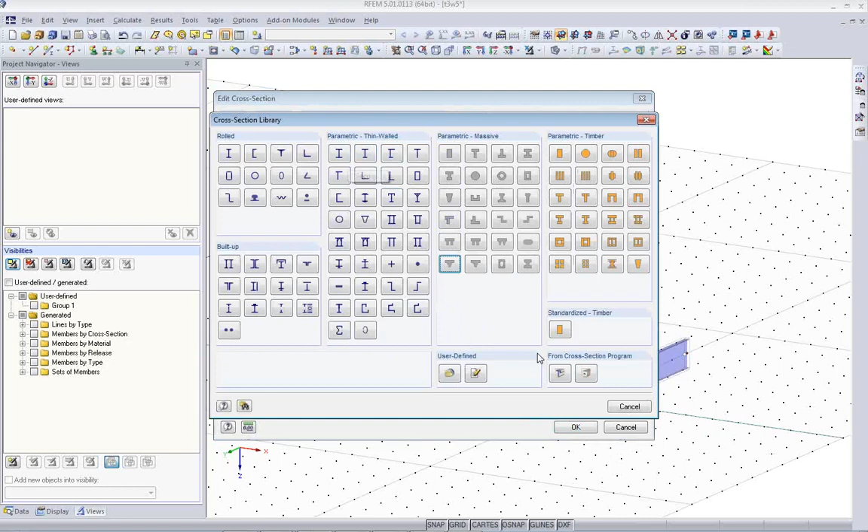It's better to maybe do this in the tables — hang on, you can see it better. Cross sections — and I change it here to maybe 1200, width should be 200 and so on. I right away have all my cross section data here.

This changed information I send to Tekla now, and I update the structure — update existing model. I look into Tekla and everything is updated now. I have here 1200, and this parametric section is also updated.

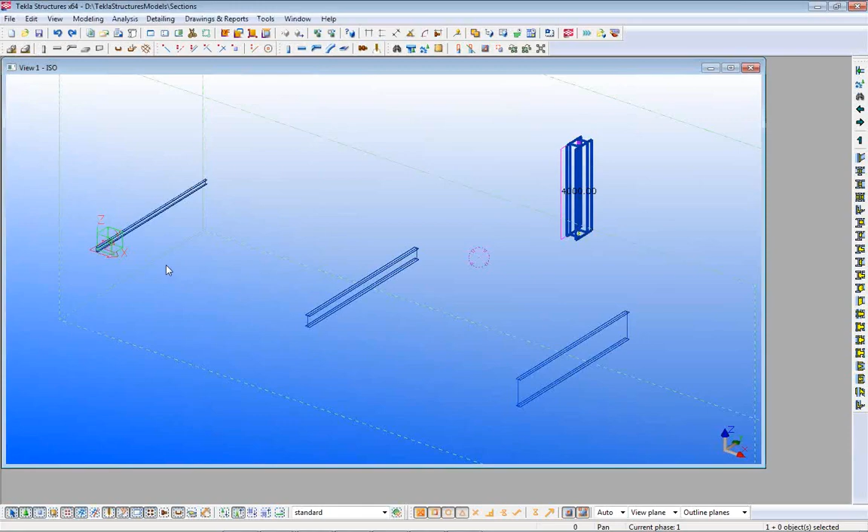One more word on this C section — in the import detailed settings that I showed you at the beginning, you can see the mapping file for materials, but also for cross sections. Here I have this cross section — in Dlubal this section is called KC200 by 2.5, provided by Starbar, and I map it this way.

So in this way I can map any cross section I like, and you can very comfortably work with this import-export to Excel options to create such mapping files. Standard cross sections are mapped by default with the software, and others can be handled with the mapping file.

The question was if we can import and export IFC files. I can show you this as well — IFC is supported here: import industry foundation classes, IFC. We support the structural analysis view and the IFC coordination view.

It's important to know the difference. The analytical view includes representation of nodes at beginning and end, supports and releases, and loads, while the architectural view, which is mainly used by Tekla and other BIM software, includes basically a 3D or solid representation of all the parts and objects.

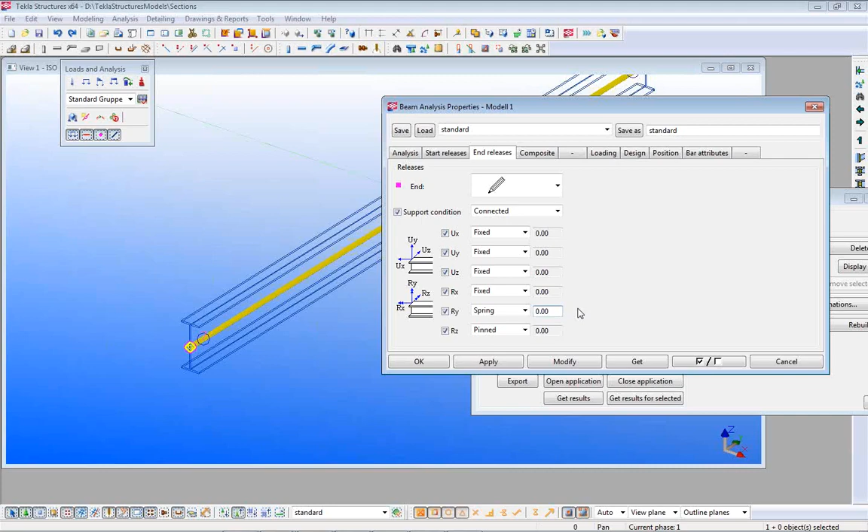Then there was the question, again, can I export a model from Dlubal to Tekla? Yes, we always write the physical model, so we're not writing the analytical bar model, but the physical model. Maybe I can create a new model or open an existing empty model that I can use to export something into it.

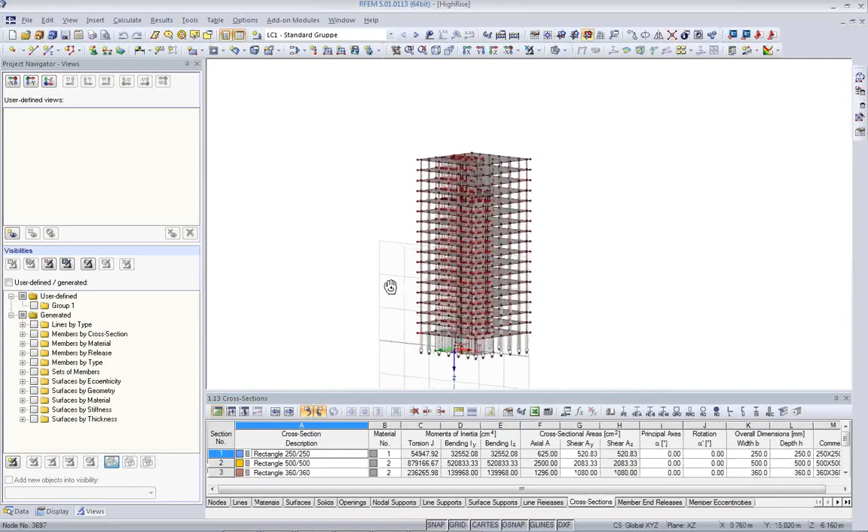Let's see what I have here. We can, for example, use something like this. This is a real project from a customer of ours who did some analysis of a multi-story building, and we can export this to Tekla Structures - export, update existing, or override in this case.

Okay, we have no results yet, so after a while we should see the model showing up here. It's built up here, and we have the 3D model, and Tekla users can use it and work with it as well.